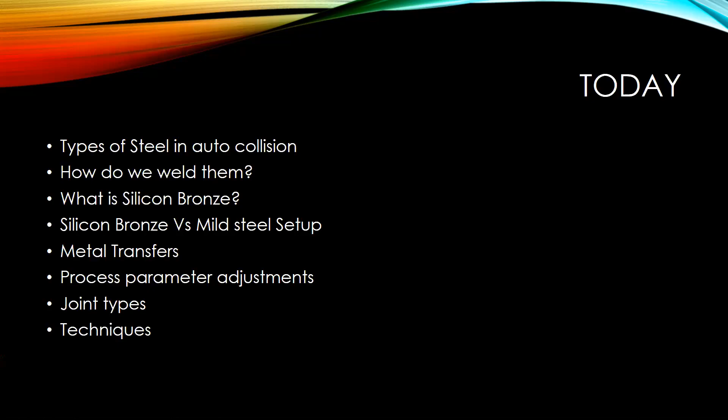So types of steel. Nowadays, cars are starting to get lighter, trying to improve fuel economy. So one way to do that is to make cars out of thinner material, but look at different ways of strengthening that material. Like I said in the last presentation, I'm working on an old '74 Ford Bronco, and that thing is like a tank, all made of steel, and there's no mixture of really anything in that.

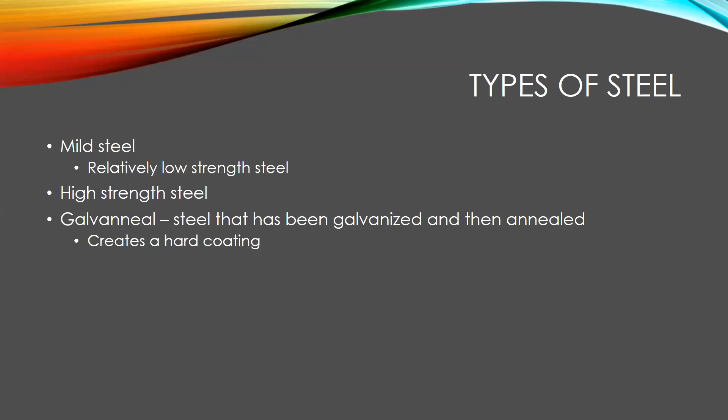But nowadays you might see cars with some mild steel, you'll see cars with high strength steel, and one other that I was going to call out is galvanneal, and that's a steel that's been galvanized and then annealed. Creates a hard coating on the outside that helps strengthen it and protect it from corrosion. On the next couple slides here, I'm going to pass the mic over to Joe and let him talk for a minute.

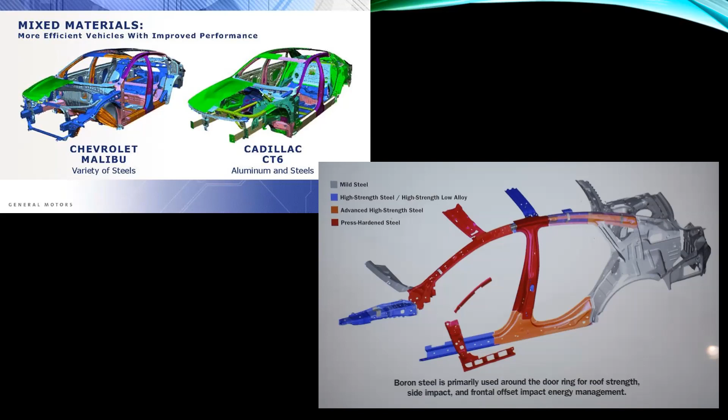Perfect. Thanks, Joe. You're welcome.

So what I'd like to shift to is, we have all these different types of metals that are going into cars, but how do we weld them? So first, steel will typically use GMAW short circuit, which we covered quite a bit in the last webinar. A new one that I'd like to talk about is joining dissimilar metals. A very common filler metal to use is silicon bronze with either the short circuit process or pulse spray transfer.

So what is silicon bronze? It's a type of filler metal. It derives from back in the day when they'd use an oxyacetylene torch and a brazing rod. Well, this process now allows you to have that wire come through a MIG gun and use a constant voltage machine to weld your pieces together, or MIG braze them together. One of the really cool things about silicon bronze is you can join all different types of material. It's really commonly used in high strength steel and also in galvanneal.

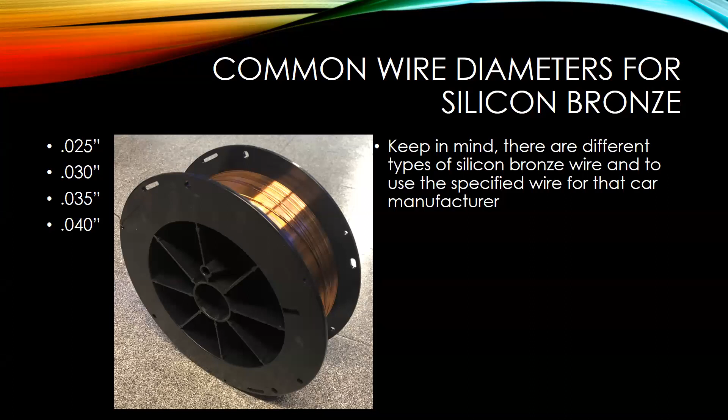Some common diameters for silicon bronze, typically you'll see .025, .030, .035, .040. One thing I wanted to also talk about is that different car manufacturers might require a specific silicon bronze wire that they want you to run when you're repairing that vehicle. So keep that in mind when you are working on repairing cars.

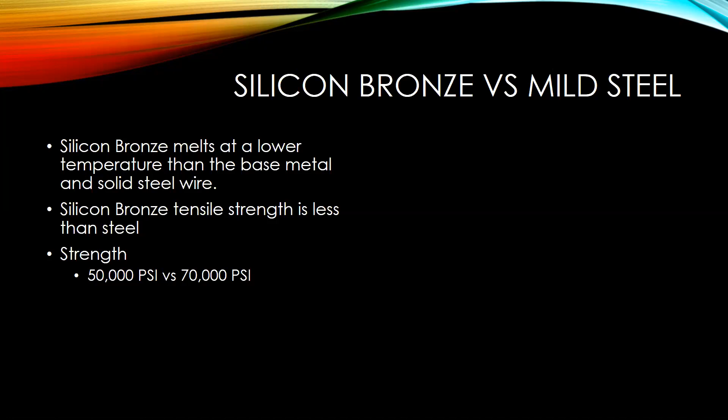So let's talk about some differences between silicon bronze and mild steel. Silicon bronze melts at a much lower temperature than the base metal you're welding on, and also at a lot lower temperature than solid steel wire. The tensile strength is also a bit less than steel, about 50,000 psi versus 70,000 psi. One of the really cool things about silicon bronze is the capillary action that occurs when you're using it.

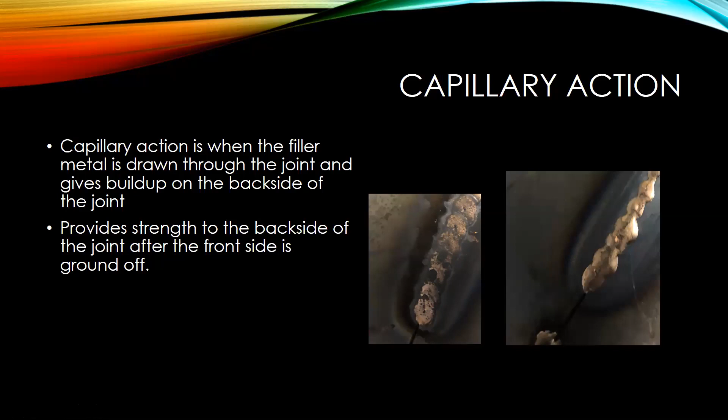And what's really nice about that is that helps to keep the structural integrity there. So when you go to do the repair work and you grind off the weld so it's nice and smooth so you can do whatever auto body work you need to do to it, you still have all that strength on the backside and in the joint.

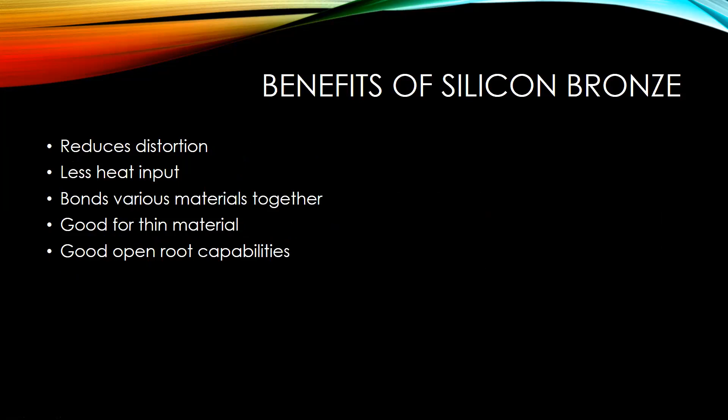So some of the benefits of silicon bronze is, first, it'll help reduce distortion because there's less heat input. You can join different materials together, different types of steel. It's really good with thin material because of its low heat input. And because of that, you can do all different types of joints, but it works really well in open root joint types.

So next I wanted to talk about, the last webinar we talked a lot about getting your machine set up for welding with steel. And today I just wanted to compare a little bit between setting your machine up with silicon bronze versus setting it up with steel.

So over on the left, the common shielding gas that's used with silicon bronze is 100% argon. Typical flow rate will be between 25 and 35 cubic feet per hour. The wire type is an ERCuSi-A, and that might vary dependent on the manufacturer. Some good drive rolls to use would be either U-groove or V-groove. The polarity, direct current electrode positive, and a good liner to use is Teflon.

One note also there is the silicon bronze wire is softer than a regular solid steel wire. And one thing you might want to keep in mind when you are using that is typically use a shorter gun, like a 10-foot gun, to eliminate any bird nesting issues.

So as opposed to a steel setup, if you're welding on mild steel, you'd typically be using a 75% argon, 25% CO2, or 100% CO2 shielding gas. Flow rate of 25 to 35 CFH. Typical steel wire is going to be ER70S-6. Lining that up with a V-groove drive roll, polarity, direct current electrode positive, and typically the kind of liner that you use is steel coil liner.

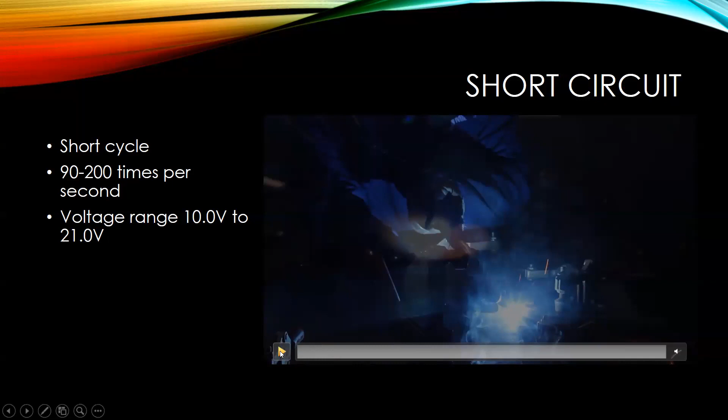And what you'll see is the wire is going to come down, make contact. The amperage is going to increase and clear the short because that wire's made contact. And then what you're going to see is the arc will stay on. Slight ball will grow. It's going to touch again, and you'll see that transfer. So there it is at a high speed. Now it's at a low speed.

So you see that contact made, clears. There's a little bit of an arc there, ball building. It's going to make contact again. And that can happen anywhere from 90 to 200 times per second. A typical voltage range you'll see is from 10 to 21 volts for short circuit transfer.

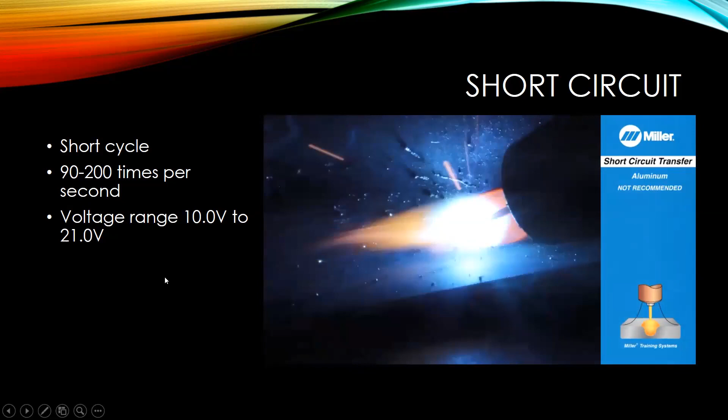So spray transfer is going to differ because as you start increasing your voltage from short circuit, you're going to start changing your transfer mode. And once you get into a high voltage, you're going to be towards a spray transfer. So I just wanted to pull up this diagram here. I really like it because it shows kind of what's going on, and we can talk through that.

So we have our nozzle here, contact tip inside, wire coming out of the contact tip or our electrode. And so we have our arc. We have our shielding gas that's protecting our arc and our molten puddle from any oxygen or anything that might contaminate the puddle. And then as you'll see, there's a pretty good distance between the end of the wire and the puddle itself. And what's happening is little droplets of metal are being pinched off and thrown across that arc into that molten puddle. And typically there's hundreds per second.

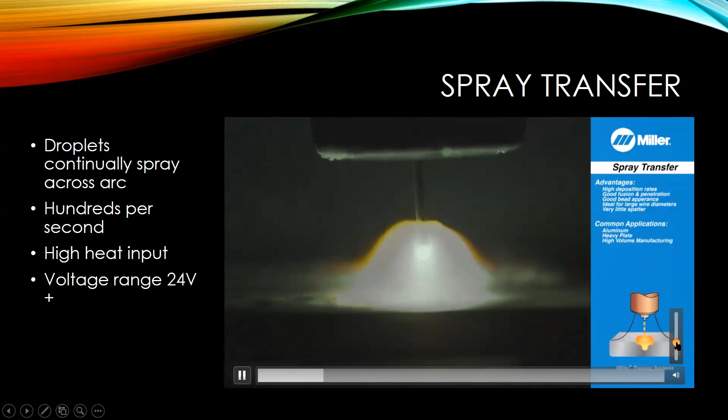So I got a video here. Let's watch and we'll see the difference. In spray arc transfer, a continuous stream of tiny molten drops, usually smaller than the diameter of the wire, are sprayed across the arc from the electrode to the base metal. With spray arc transfer, the arc is on all the time.

One of the things that you'll notice is, there is that good distance in between the end of the wire and the puddle. We have our arc here, and it definitely sounds different than short circuit. You don't get that buzz, you have more of a hiss sound.

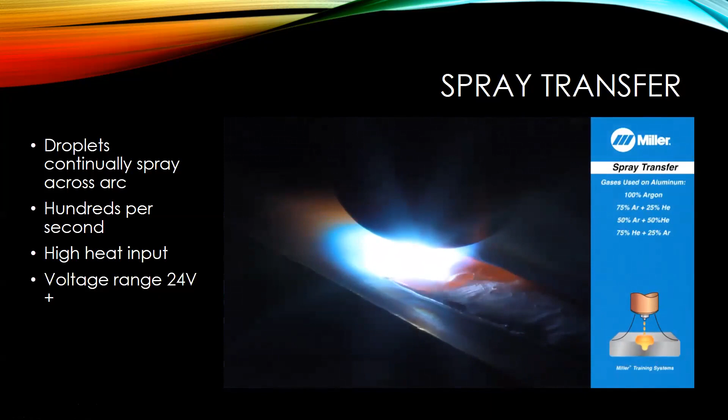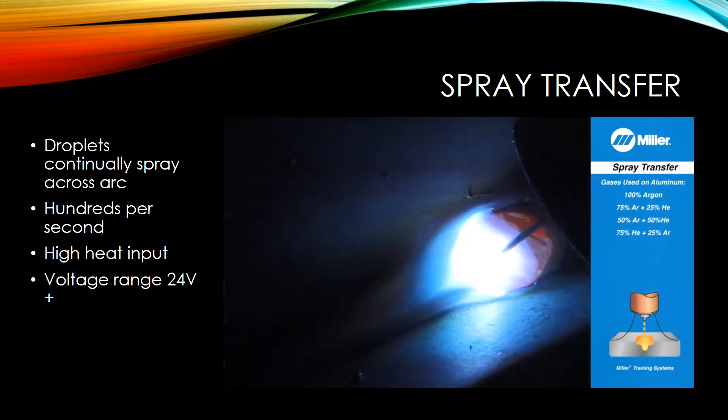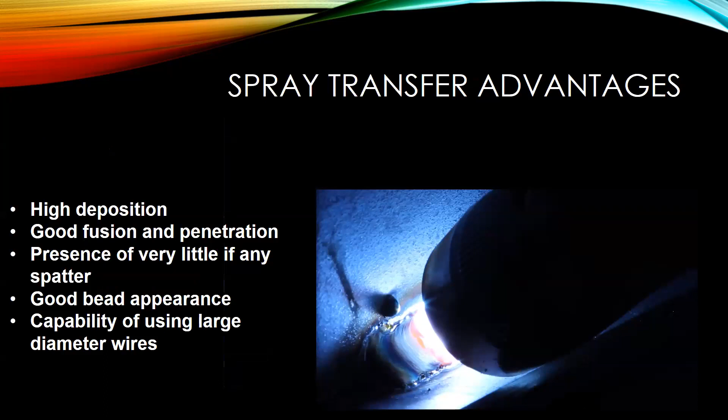So spray transfer isn't typically used in auto collision, but I kind of want to talk about it a little bit because spray transfer is used in industry a lot, but it's usually used towards thicker plate, like 1/8 inch or thicker. Good thing about it is you get high deposition rates, so you transfer a lot of metal quickly. It allows you to travel fast, and because you're never shorting, there's little to no spatter. You can also run large diameter wires.

Some of the limitations, like I had said, it's limited to 1/8 inch and thicker. Works best in flat and horizontal position. Typically, you don't see it used out of position. And typically, you get really good penetration from it.

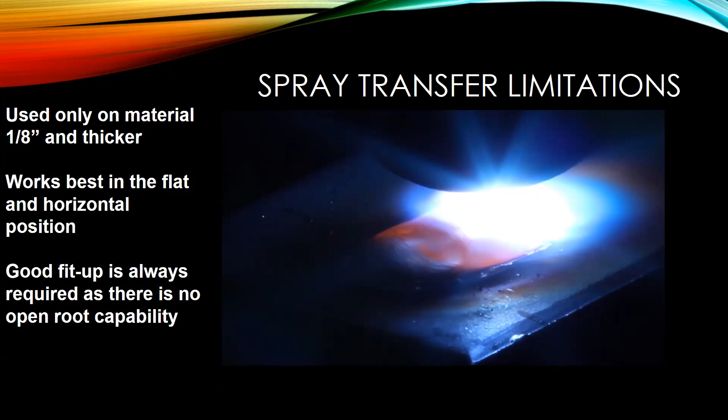So pulse spray transfer, now instead of just doing a constant stream of droplets across that arc, you'll see in slow motion that as the current rises, once we hit this peak, that'll allow us to transfer a droplet, and then we'll move to our background amperage, and that'll keep our arc maintained. So basically, we're going in between a high current and a low current or amperage.

That helps us to take that weld out of position if we need to. So we could go vertical, we could go overhead, we could do horizontal, flat, whichever way we need to. But one of the really nice parts about that as well is you can eliminate a lot of spatter and get a really nice arc. So let's go ahead, let's watch this video.

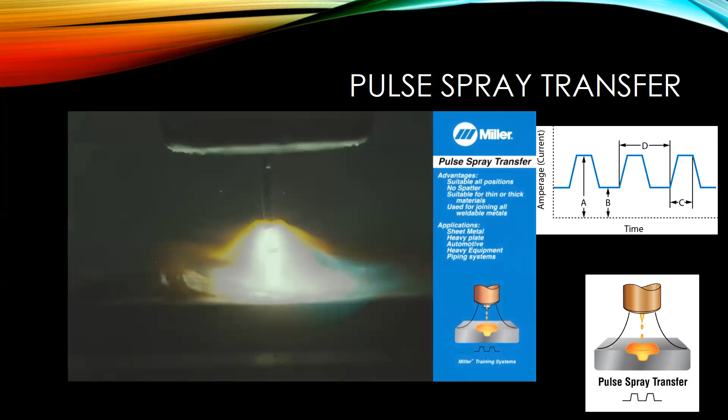You can hear right off the bat that the sound is different. You have a little bit of a buzz, but as you're looking at that arc, we have our arc here. It's transferring one droplet with each pulse there. And so we can really control how much metal we want deposited.

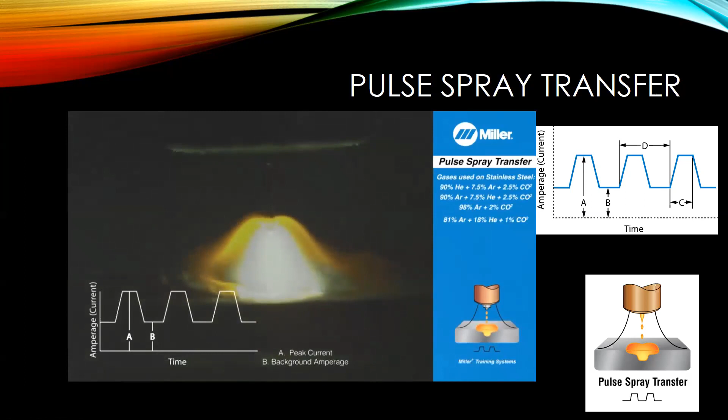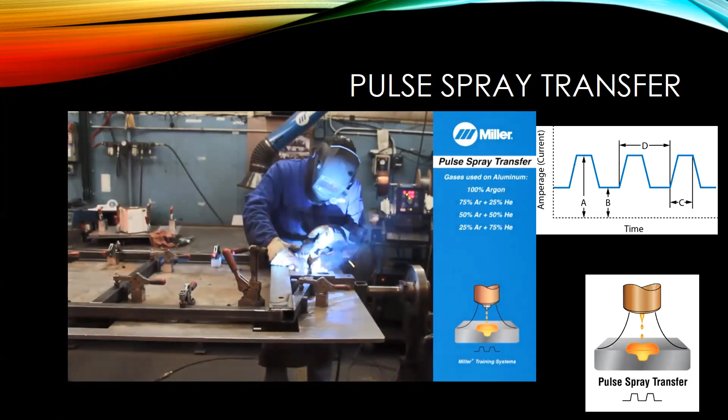So pulse is getting really popular. Like I had said, if we're looking at a waveform of what's happening with the voltage and the amperage, as your amperage goes to the peak, it's going to be transferring a droplet, which helps push it across the arc. And then as you go to your background, it helps maintain that arc, keeps it lit.

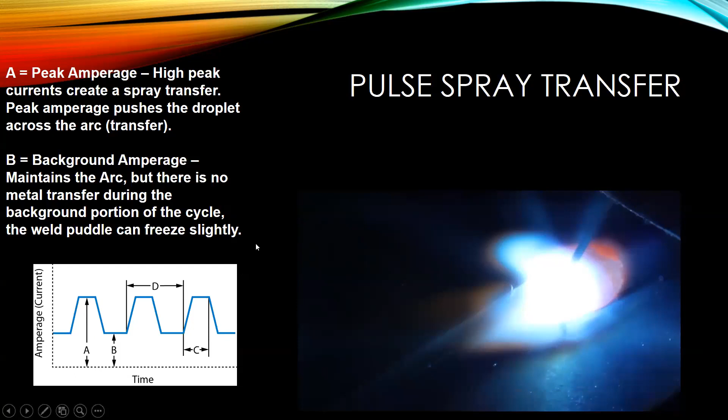So one of the things I want to talk about next was, how do our parameters differ between short circuit and spray transfer versus pulse? What would we adjust on each machine? And then I took some welds with silicon bronze, took some pictures of them, and we're just going to talk through those and how that affected that weld puddle.

So typically with short circuit or spray transfer, you're going to be using voltage and wire feed speed to adjust your parameters on your machine. Those are going to need to be dialed in accordingly.

If you're running pulse spray transfer, pulse is synergic. So you have a couple of adjustments. You're going to have a wire feed speed adjustment and also an arc length or trim or arc adjust. A lot of the terms are adjusting the same thing, but what that's going to do is allow you to adjust the distance between the end of your wire and your weld puddle. So as you decrease that arc length, it'll tighten that up, or if you increase it, it'll make it longer.

What's going to happen is it might affect your puddle width a little bit. If you need to narrow up the puddle, you can always tighten it up a bit. It also helps depending on the joint type that you're going to be welding up. So it allows you to adjust that.

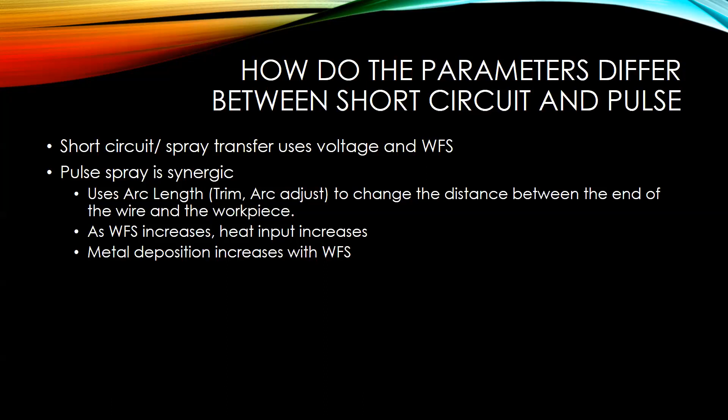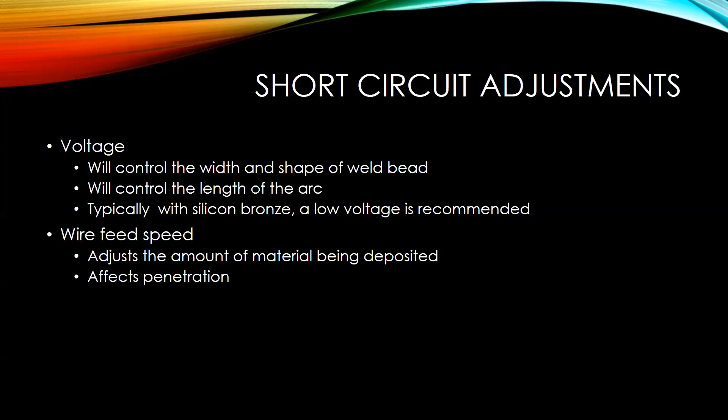So let's dive in a little bit more into the short circuit adjustments. Voltage will control the width and the shape of the weld bead. It'll also control the arc length. As we were talking about before, once we start getting into a high voltage, that'll change our transfer and our arc length. Typically what you'll see with silicon bronze, though, is a really low voltage is used versus a solid steel wire. For wire feed speed, it'll adjust the amount of material being deposited, and it'll also affect your penetration.

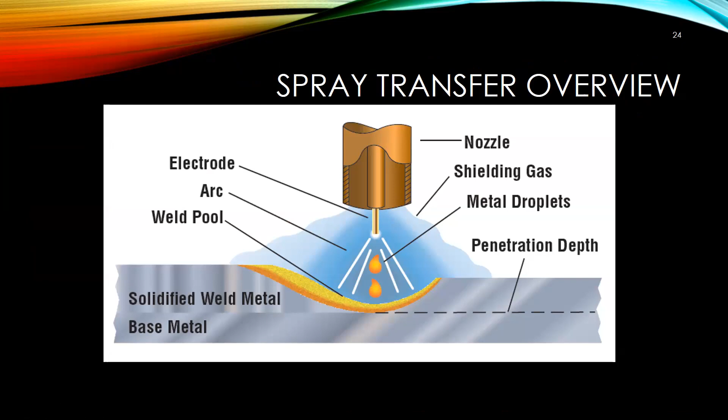So pulse adjustments. Like I had said before, arc length or trim or arc adjust is going to change the distance between the end of the wire and the puddle. Typically what I recommend is start out with the nominal setting when you are dialing in for silicon bronze, and then adjust as necessary, because for each joint type, you might have to adjust that a little bit depending on what you like.

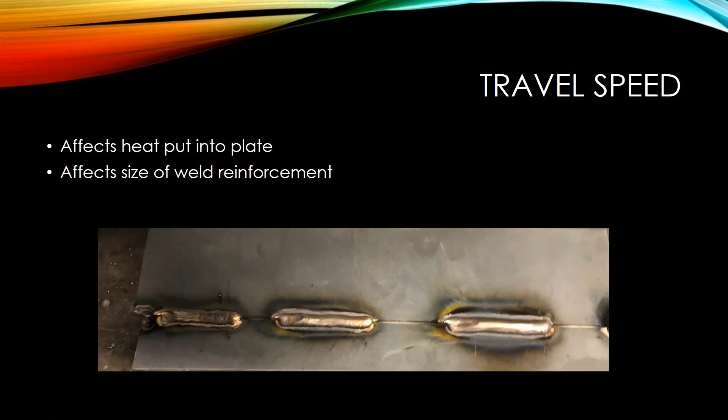So looking at these three welds, you can see a size difference between them. Here I was using a rather slow travel speed. The middle weld, I had picked up the pace a little bit as I was moving down. And then the third weld, I was really traveling fast as I was going across there. So just a couple of things to keep in mind. It'll affect the heat going into the plate. The slower you're traveling, the more heat you'll get. The faster you travel, the less heat you'll get into the plate, and then it also affects that weld size.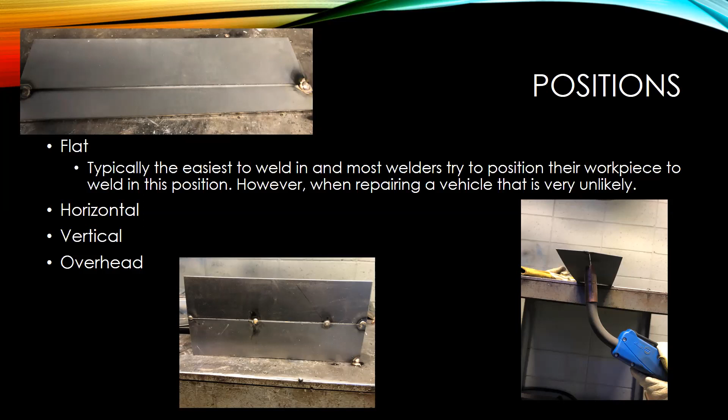Usually welders will try to weld everything they can in flat position because it's usually the easiest one to weld in. However, if you're rebuilding a car, working on a car, you don't have that luxury of being able to flip the car over and keep all the welds in the flat position. So as you are in different positions, you may need to adjust your weld settings accordingly. So all machines might not have the same parameters. They might not have parameters for silicon bronze. One thing that you might end up having to do is dial in those parameters yourself and do a weld test to verify them.

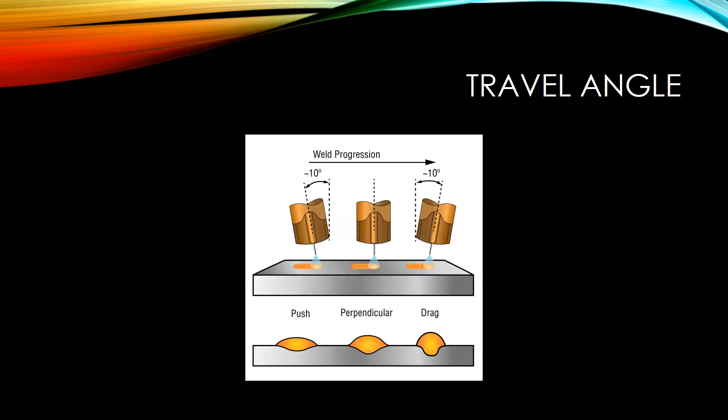Next one. Yeah, you go.

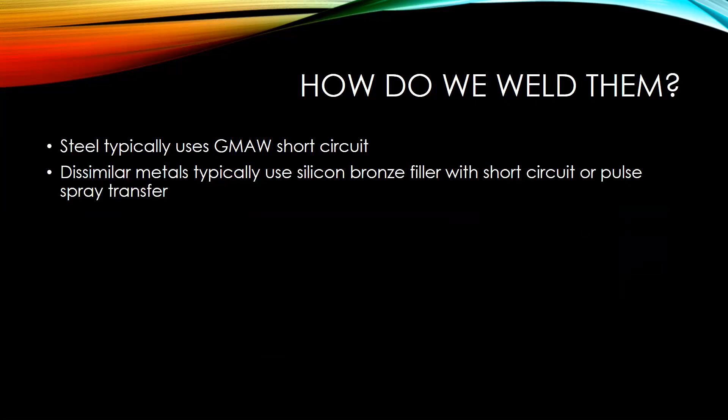So one thing, when it comes to Honda and Acura vehicles, if you're repairing a late model Honda and Acura vehicle, whether that's an RDX here, an MDX, an Accord, an Odyssey, a Civic, any of them, anything starting probably 2015, 16, when they started making the switch to that 1500 MPa steel in the side aperture, A-pillar reinforcements, B-pillar, rocker panel, even the rear rails on the Civic.

If you're repairing Honda vehicles, you have to have MIG brazing equipment, and you have to know how to use that MIG brazing equipment. Spot welding is a preferred method for attachment on all those panels. However, there are several locations, most notably at the base of the B-pillar near the rocker panel area, where you cannot access those joints with a spot weld. You don't have access to that backside, and in those locations, Honda calls for MIG brazing.

And they call for MIG brazing using pulse spray transfer, as Ace went through, not short circuit. Volkswagen allows either or, but Honda is all spray transfer requirement for all their vehicles. But you have to use silicon bronze in those areas to repair the vehicle properly.

And additionally, one thing when it comes to Honda is, a lot of the OEMs, when they call for MIG brazing, they'll use a slot weld, like an elongated oval hole, usually close to an inch long. On Honda vehicles, they recommend using side-by-side, essentially plug weld holes, in a zigzag pattern. And Honda's got a lot of great information on their website for this.